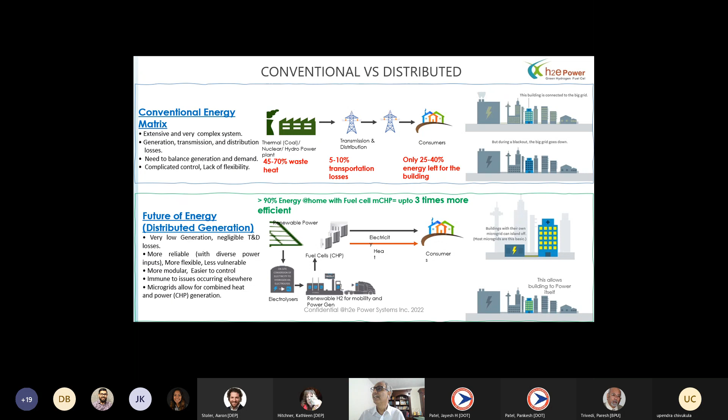Again, this is 7x24, 365. So we have a system today. We have around 1,000 systems running in Europe, and a few hundred systems running across the world. We have 3-4 systems running in the United States. But this is our configuration.

We have a technology that allows us to produce power, heat, and hot water at very high efficiency. It can be scalable; we can build a system from 1.5 kilowatt to megawatt. Our system can reduce carbon footprints. It can take natural gas today, and in the future it will take green hydrogen also. This is a fuel cell technology.

The system runs 24/7, 365. The life of the product is more than 10 years, and every 5 or 7 years you have to replace the stack, just like a filter.

So this is what we are trying to do. We have a scalable model; we can scale from 1.5 kilowatt to megawatt. Our system is very reliable, and it is absolutely noise-free. There is no noise. If you run the system, you will not notice anything in your house or in your commercial building.

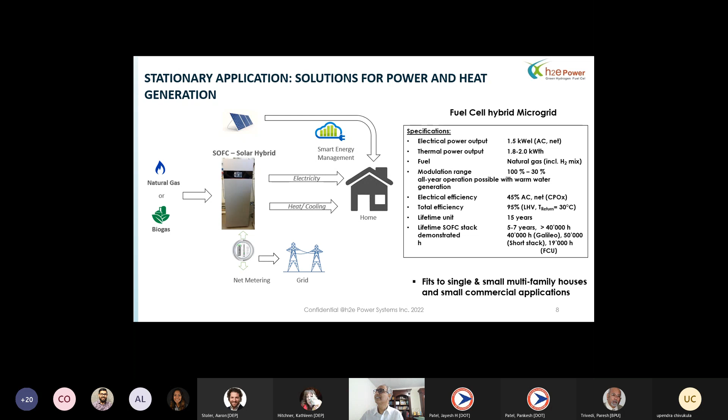As I mentioned before, our system can scale to a bigger system. We can also scale the same technology to 50 kilowatt, 100 kilowatt systems. We have one system today running on biogas in Finland at 50, 52 kilowatts. And if you put 5 or 10 together, you can have a megawatt power plant.

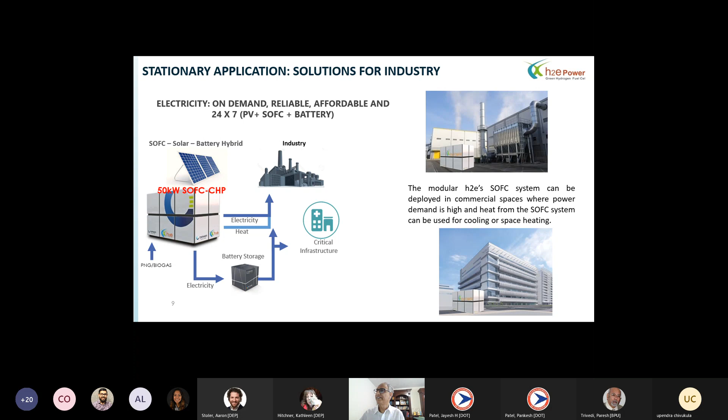So my goal is to bring this technology from Switzerland and Germany to the United States. I am in the process of raising capital to build a manufacturing plant somewhere in New Jersey, Massachusetts, or Ohio, and assemble the system here. There is no technology work that needs to be done - everything is done. I want to assemble the system and put it into the market after I get certification done, and then support the system. That's my goal.

Any questions? I have one question, please.

About hydrogen diffusion from connections between pipes and valves - has that been cleared up, or is hydrogen leaking from different threaded connections as well as valves?

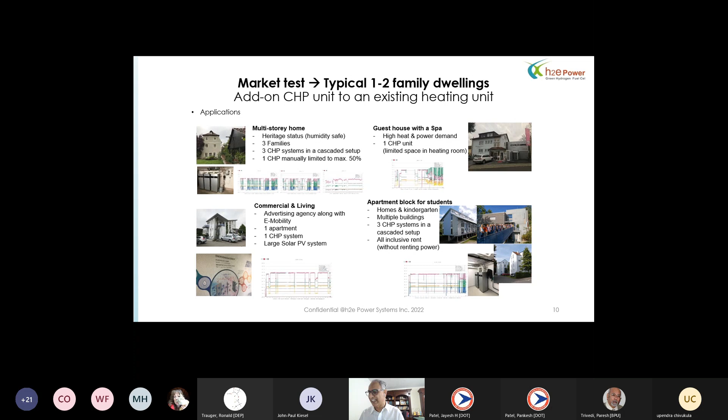Suresh, one thing you may want to watch out for is the make in America or made in America provision. I don't know how that works with subsidies, so you may want to pay attention to that. Yeah, and again, I really want to assemble here, bring this whole thing, because it's no point for me to assemble in Europe and bring it here. Every component in my system, except one critical component called the stack, is a standard component. There's nothing rocket science about it.

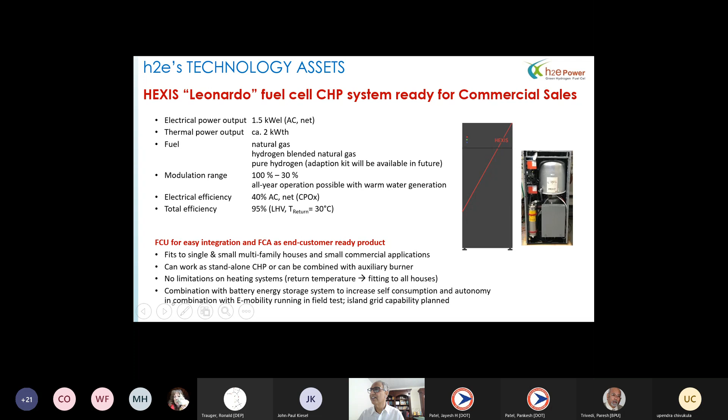So if you look at this system here, next slide, only one piece is a stack which requires assembly. That's an IP, just like a motherboard. Everything else is a standard component I can buy from the open market.

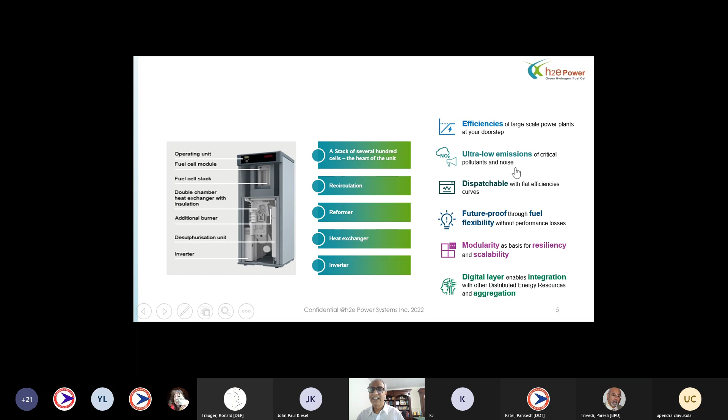So if you look at this box, there are 469 components in the system. Only one component is the most critical IP we have, with more than 150 patents on that particular stack. Everything else you can manufacture, assemble or build anywhere in the United States - there's the cabinet, piping, standard pump, nothing else that critical. So my goal is first to bring the stack from Europe, then buy all the other components here, assemble the system here, test it, and then go to market.

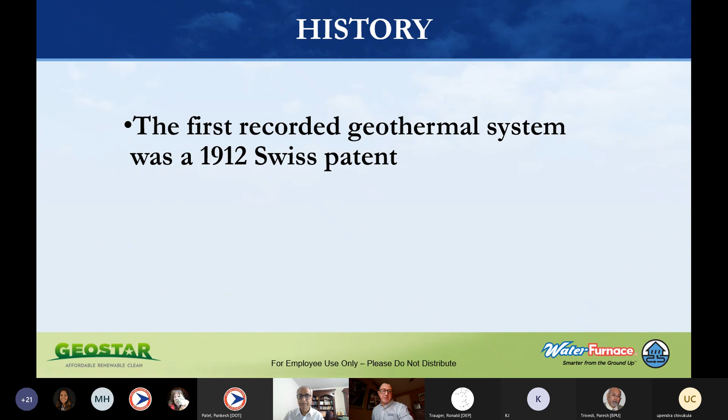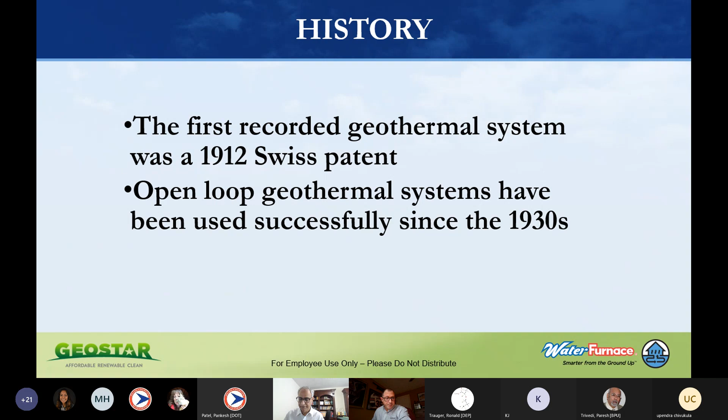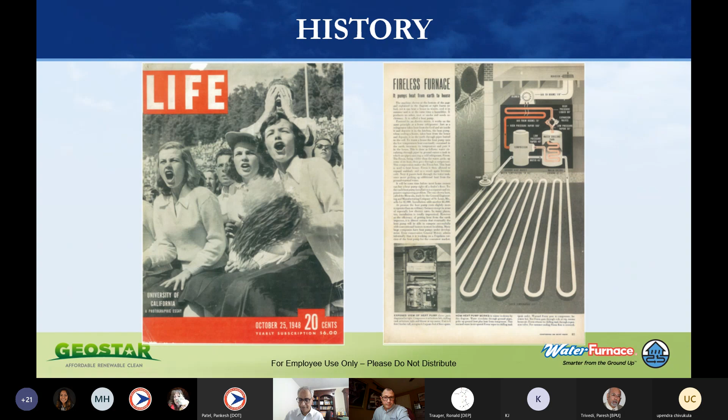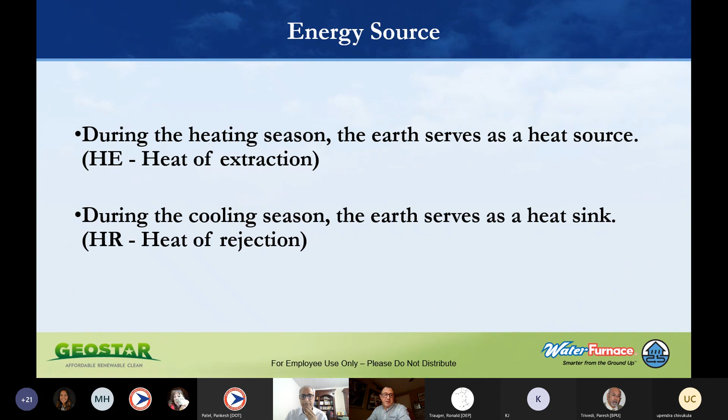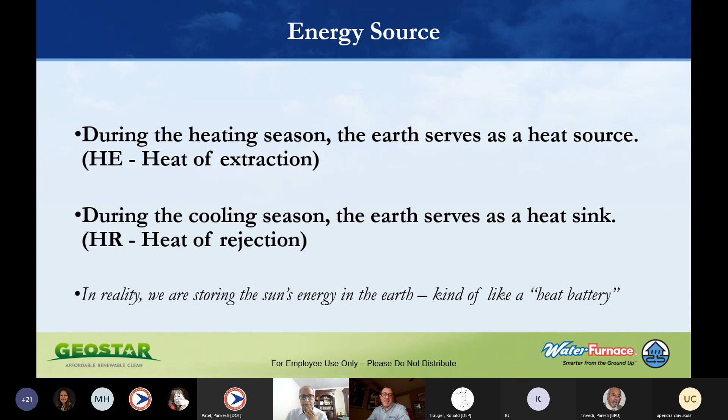With geothermal and ground source heat pumps, as the name indicates, we're using the earth as an energy source. During the heating season, we're taking heat from the earth and moving it to the home - that's called heat extraction. In the cooling season, we're using the earth as a heat sink, taking the extra heat from the home or structure and rejecting it to the ground to be stored, essentially, to use at a later date. The earth absorbs almost half of the thermal energy that hits it from the sun, so essentially we're tapping into that and using the ground like a gigantic heat battery.

The basics of a ground source heat pump system - the earth loop is really where the magic happens. That's how we're able to exchange energy with what's essentially an infinite energy source. The earth loop is placed either in the ground horizontally or vertically, or it can also be placed inside a pond, a lake, or another adequately sized body of water.

Our factory, for example, is based in Fort Wayne, Indiana. That's where we make all of our equipment, and the whole operation is run using ground source heat pumps - we have a big lake loop that runs the whole facility.

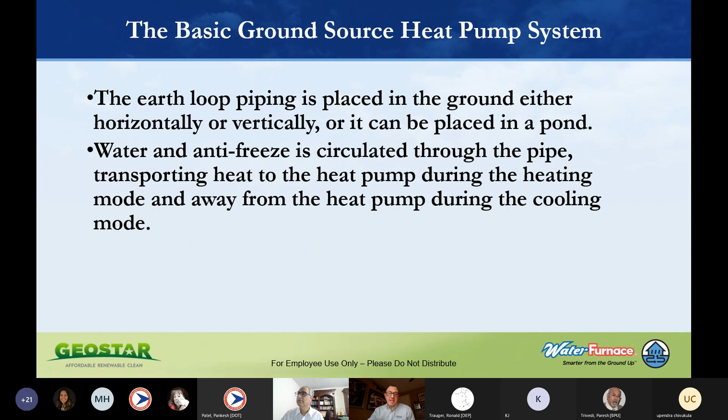A water and antifreeze solution, also called a brine solution, is circulated through that piping so we can transport heat to the heat pump during the heating mode and away from the heat pump during the cooling mode. The heat transfer takes place inside a water-to-refrigerant heat exchanger called the coaxial heat exchanger.

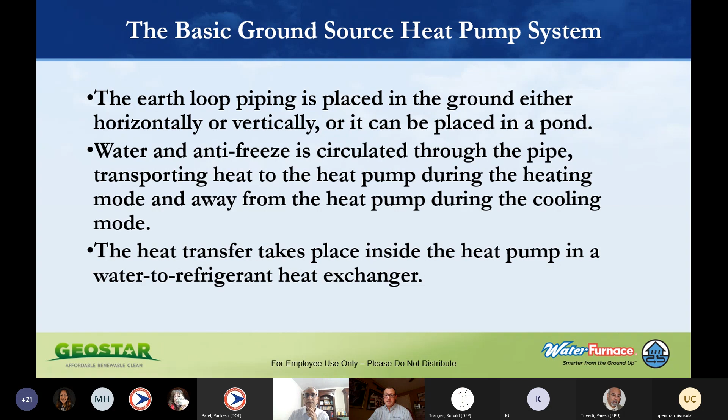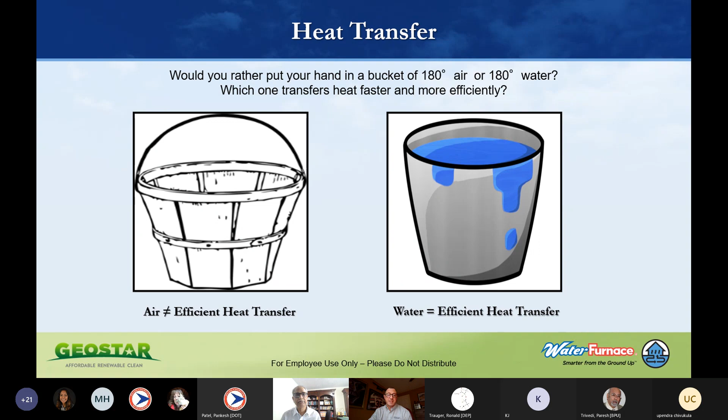We differ from our cousins in the air source heat pump world in the means we use to transfer heat. If you put your hand inside an oven that's 180 degrees or so, as long as you're not touching the sides, you can leave it in there for a pretty long period of time. But if you put your hand inside a bucket of water that was 180 degrees, you'd really see how quickly the heat transfers using water - so it's a much more efficient means of transfer.

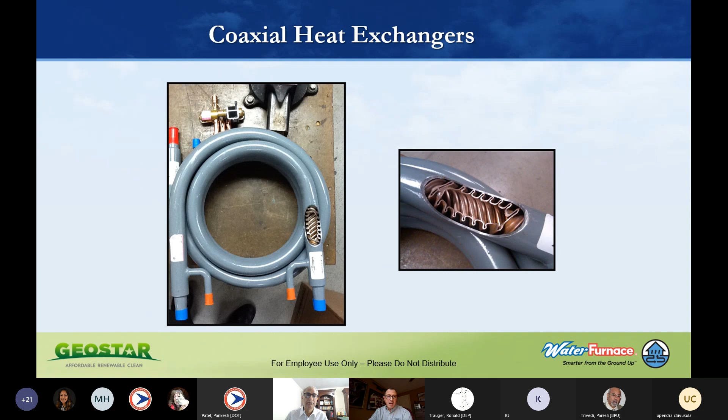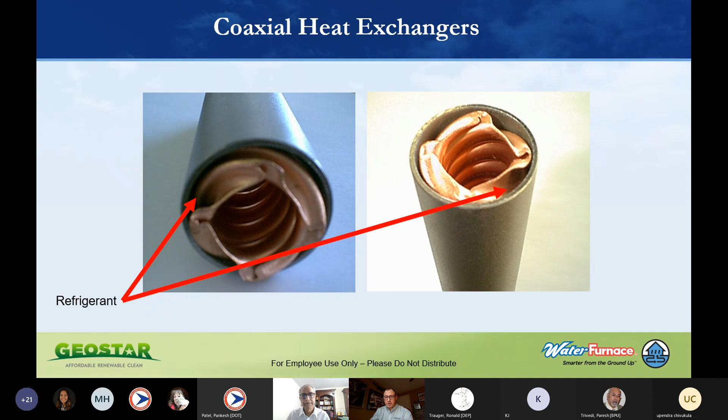Here we have an example of a coaxial heat exchanger in cutaway - you can see a detailed photo on the right. Here we've got a shot of the same coax heat exchanger from the end. The water or brine solution runs through the center of that twisted copper pipe, and the refrigerant is circulated between the copper pipe and the outer wall you see there. Essentially, it's very similar to a flue pipe that you'd see for a condensing boiler or furnace - both are running through it at the same time, but they're not coming into contact with one another.

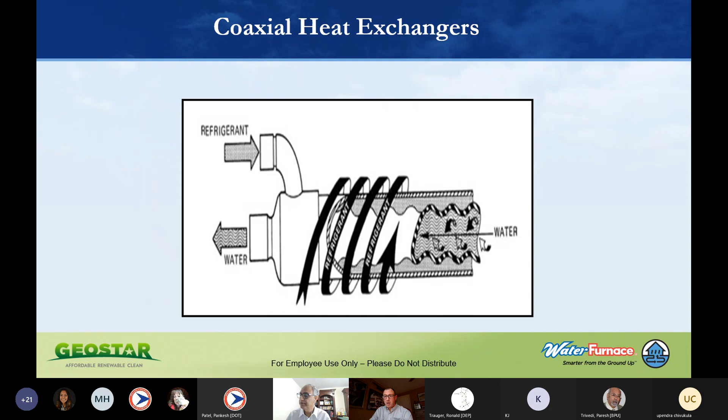A lot of times people will ask me, well, how can you heat a home when you're taking heat from the ground, which, once you get down far enough, averages about 50 degrees and pretty much stays there all year round, not influenced by the outdoor air temperature.

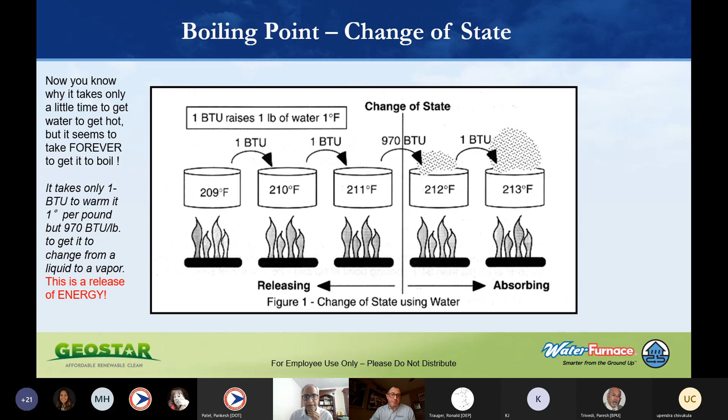By using refrigerant, a state of change, and being able to manipulate pressures, we can do that. So 1 BTU will raise 1 pound of water by 1 degree Fahrenheit. But then once you hit 211 degrees, to get it to that boiling point and to that state change, we need much more energy, almost 1,000 BTUs, in order to get that liquid to turn into a gas. And that is where you get that massive energy release.

With refrigerants, in conventional residential equipment right now, 410 is the preferred refrigerant. That's going to be changing in a few years, but we'll use that as an example right now. At 10 psi, it will boil at minus 41 degrees Fahrenheit. At 500 psi, it's going to boil at 134 degrees Fahrenheit.

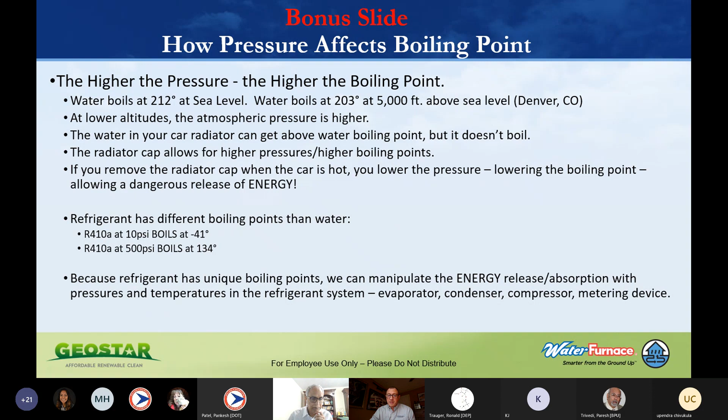We're able to manipulate the energy release and absorption of energy at different points in the refrigerant cycle by using metering devices, condensing coils, evaporator coils, compressors, those sorts of things.

Here we're going to look at an example of what the refrigerant cycle looks like inside of a water source heat pump, and I'm going to equate it to something that most of you are probably more familiar with. Over here on the left, we can see the air coil, and that's going to be the equivalent of the air coil that you would have sitting on top of the furnace in your basement or mechanical room, for example, or in the air handler in your attic for your air conditioner, maybe. The big difference, though, with ground source is the coaxial heat exchanger, as I've mentioned before, and this coax over here is going to be connected to the ground loop.

And what that equates to in a conventional system is like your outdoor condenser coil over here, which is what's used to exchange the heat in your conventional air source kind of system. Obviously, the compressor unit is going to be in the conventional system on the outdoor unit, but in our equipment, the compressor is going to be inside the house.

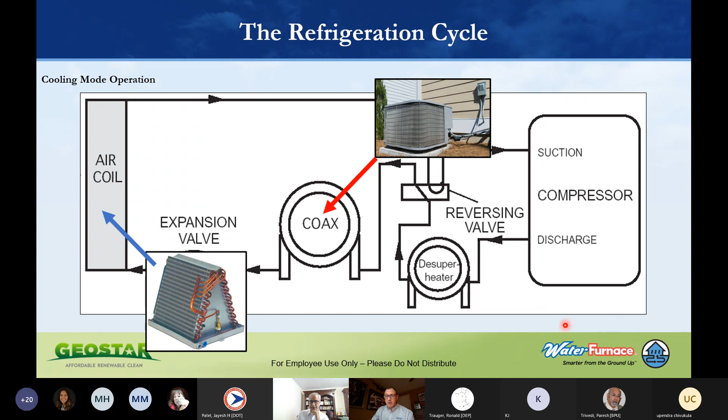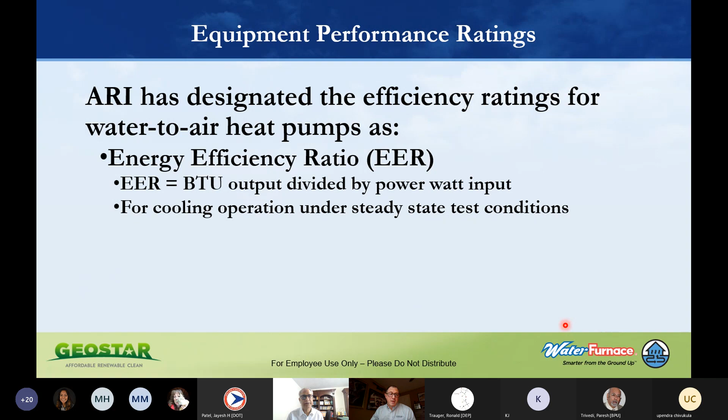ARI has designated the efficiency ratings for water-to-air heat pumps and water-to-water heat pumps as just water source heat pumps. We use EER, or energy efficiency ratio, and that's basically the BTU output divided by the power watt input. That's going to be your rating for your cooling operation under steady state test conditions. And then on the heating side, we're using coefficient of performance, also known as COP. That's just the BTU output divided by the BTU input. So that's heating operation under steady state test conditions.

Just to give you an idea, your toaster, electric baseboard, any standard electric resistance heat has a COP of 1, meaning it's 100% efficient. We're getting every bit of energy that we're putting into it back as thermal energy out. By using heat pumps and refrigerant, we're able to explode that. With ground source heat pumps, our most efficient equipment has COPs as high as 6. So for every 1 unit of energy you put in, you're getting 5 free units back from the earth.

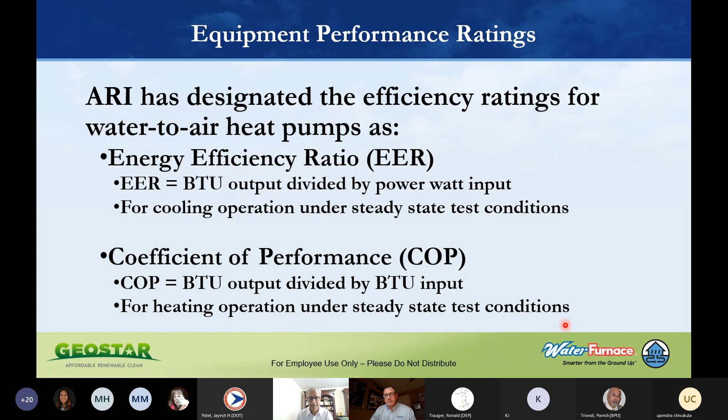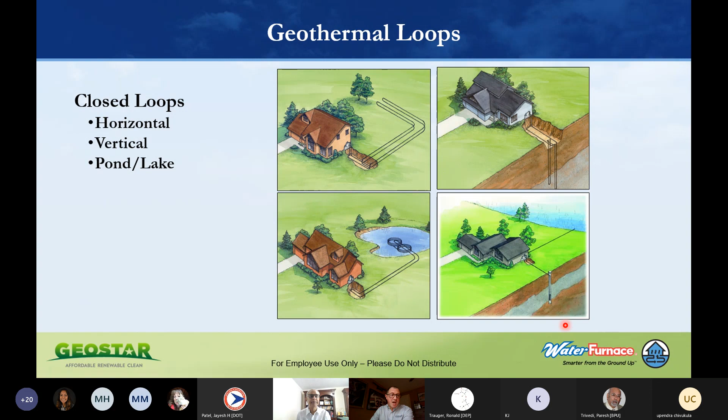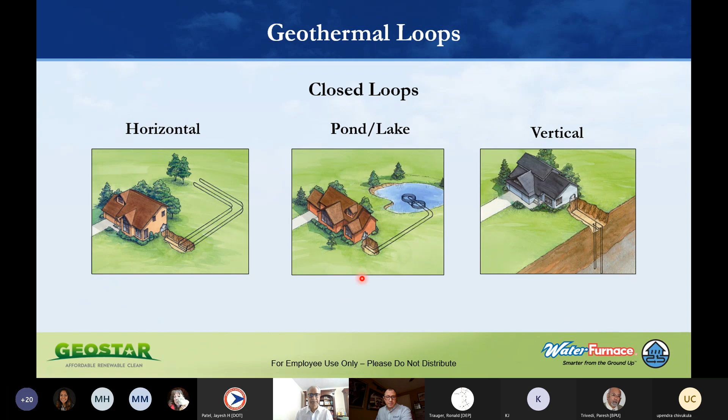Over here we've got some examples of geothermal loops. There's closed loops, your horizontal loop, vertical bore, or a pond or a lake loop. And then there's also your open loops, which use well water. So on the left, we'll see the example of a horizontal loop. This is an example of a pond loop or a lake loop. And then this is going to be your vertical bore over here.

The features of your typical earth loop are going to be the circuit piping. There's going to be multiple circuits typically, and those will be either trenches or bores for a vertical application, which is typically what we're going to see more of in New Jersey, in North Jersey in particular. It's almost always going to be a vertical bore, and the amount of circuits is going to be sized based upon the capacity of the equipment and what the structure requires.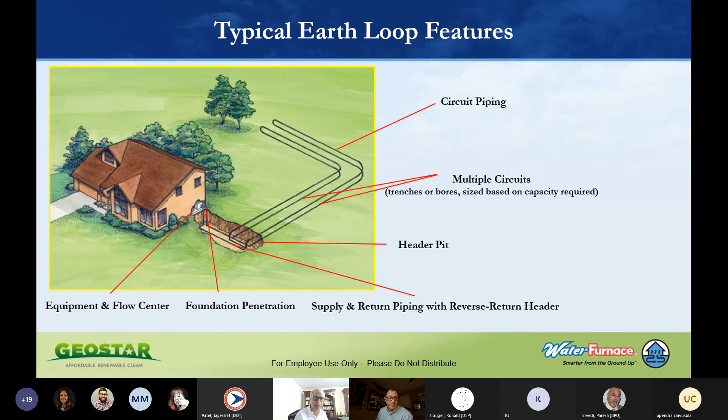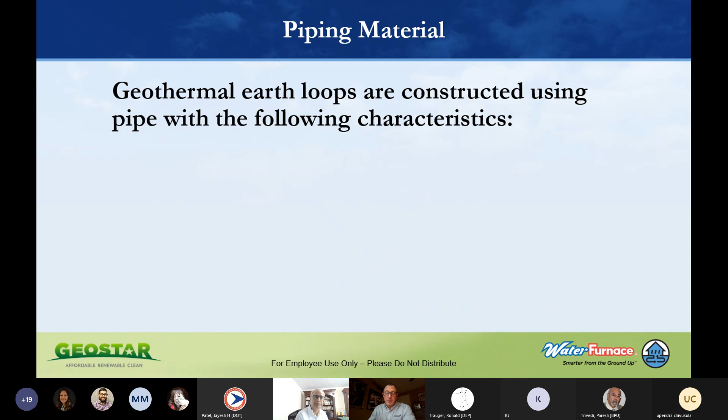The piping material used to construct a geothermal heat exchanger is polyethylene pipe, HDPE 3408, SDR11 rated, in IPS sizes of 3/4 of an inch in diameter and up. All connections are done using heat fusion at 500 degrees Fahrenheit, so there are no mechanical connections. When piping is properly fused, you have one continuous piece of material with no opportunities for leaks at any of the connections.

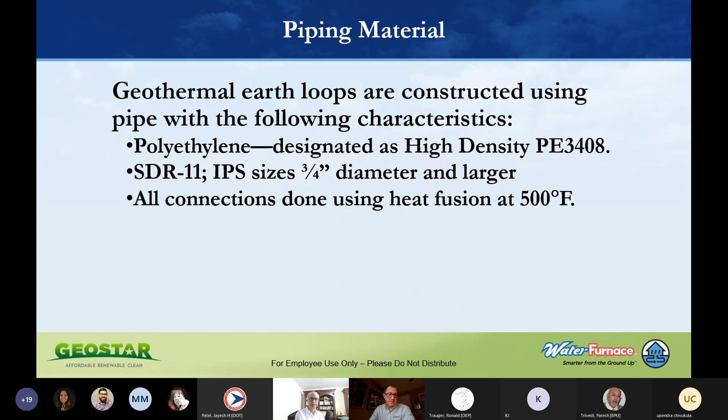HDPE 3408 is one of the highest rated materials for stress crack resistance. It's made of a carbon black material that provides UV protection from the sun, so on the job site a contractor doesn't have to protect it, and there's no degradation in material integrity from UV rays. It can elongate to six times its original length before any pipe failure, making it an extremely durable material with a life expectancy of 100 years or more.

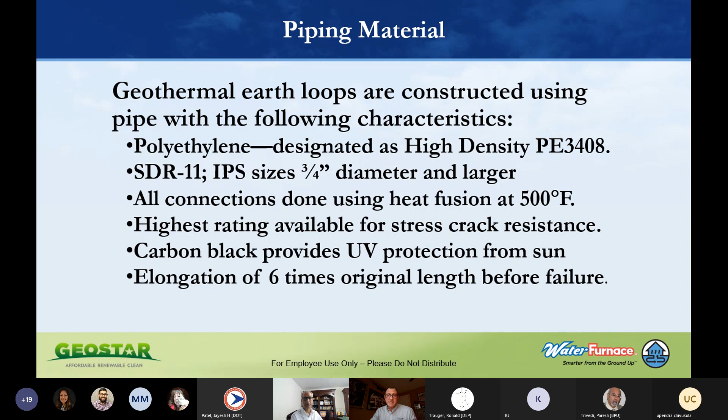For a lake loop, you want to have it at a minimum depth of at least 8 feet, and keep in mind that's the lowest level. For example, last summer we had a pretty bad drought in New Jersey, and water levels in lakes and reservoirs dropped considerably in some areas. So you want to make sure these lake loops are submerged at an adequate depth if this is something you're going to choose.

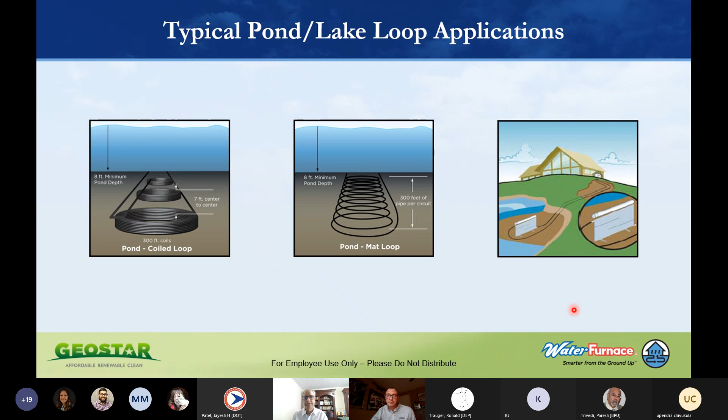Then we have open loops. Some key considerations when thinking about an open loop system: number one is an adequate water supply. We want a flow rate of a minimum of 1.5 to 2 gallons per minute per ton of capacity, in addition to whatever the domestic requirements of that household or structure are.

We want good water quality flowing through the equipment. If you've got a well at your home and notice a lot of calcium and lime scaling on your faucets and aerators, that's also going to build up on the inside of the equipment, reducing the life of the equipment as well as the efficiency of the heat exchange. So we want good quality water flowing through to protect your equipment and make sure it's operating at its peak.

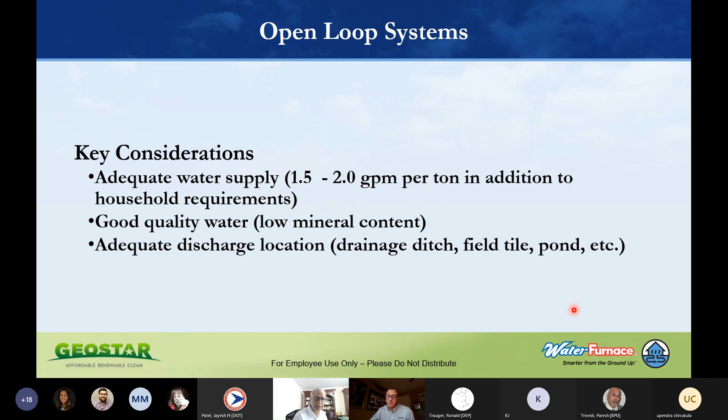We also want to make sure we have an adequate discharge location, such as a drainage ditch, a field tile, a nearby pond or body of water, or an injection well. It varies depending on codes and DEP requirements. Typically in New Jersey, when I see open loop designs, there's a well we're taking water from, and a second well we're injecting the water back into, so you'll want to check with your local code officials.

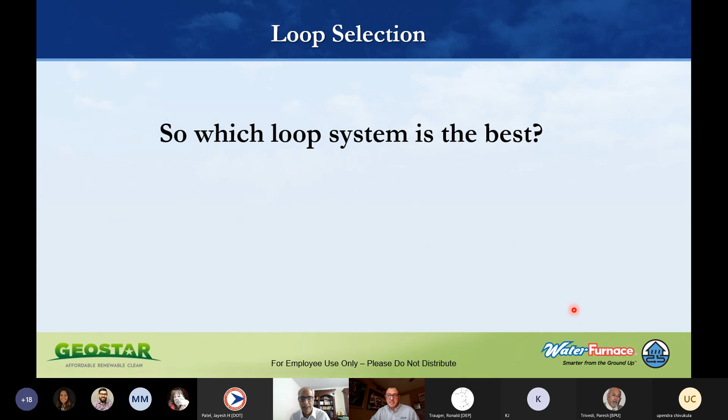Here's the big question I always get: what's the best loop? It's a pretty simple answer really. The best loop is the one that's going to meet the capacity and comfort requirements of the structure and the equipment for the lowest installed price. They all work great—it's just which one meets your particular requirements. So just like everything else in life, the answer is: it really depends on the specifics.

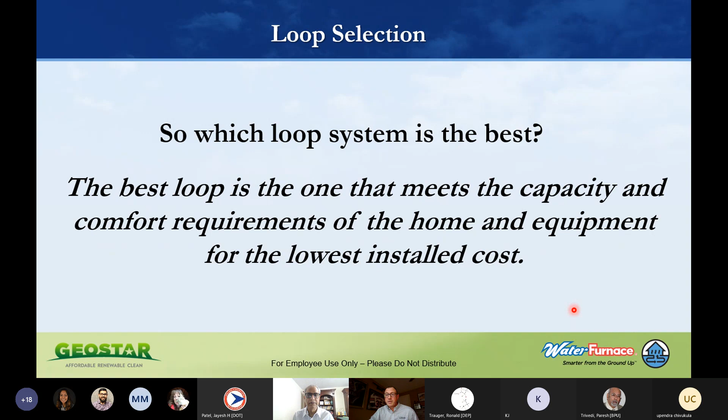In order to design a loop properly—because if you've got a geosystem with a poorly designed loop, it's not going to work, and that's not because the equipment isn't right, that's bad design—so how do we properly design a loop?

At WaterFurnace, we have a program that we use called GeoLink Design Studio. This is for residential applications. There's different software available also for residential applications, and you'll want to use different software for commercial applications as well.

By using the proper software and coming to the table with a good load calculation on the structure, we're going to ensure we have a proper loop design. GeoLink Design Studio, for example, makes sure you have the right loop design. It gives you operating cost comparisons, demonstrates financial scenarios and cash flows, calculates pressure drops and pump sizing, and tells you your loop volume and how much antifreeze you need. It's an excellent and necessary design tool.

Using rule of thumb on something like a loop is a very bad practice, and it can be very expensive to fix if you short loop and don't have the proper capacity.

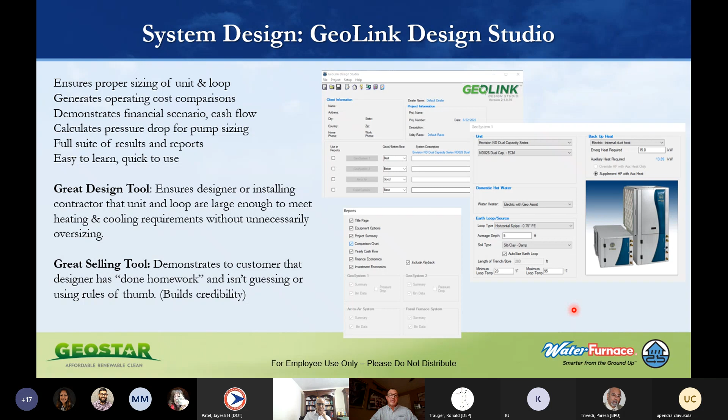If we've got some extra time, I've got an example of a report that I generated using GeoLink, so maybe we can go over that in a little bit. Yeah, you can do that.

Some of the key benefits of a geothermal system to homeowners: energy savings for heating and cooling, as well as options to supply domestic hot water, quiet operation, and less maintenance. One of our systems really has hardly any maintenance to it at all.

All you need to do is change your air filters, make sure the air coil is clean, and make sure the condensate drains are clear, and that's pretty much it. You don't have to check refrigerant levels or clean an outdoor unit, because there's no outdoor condensing unit required, which means you have a much longer life expectancy, almost double that of a conventional system.

A conventional system is rated by ARI at about 12 to 15 year average life. A geosystem typically has about a 25-year life expectancy. I frequently get calls from customers looking to replace units that are 30 years old and older.

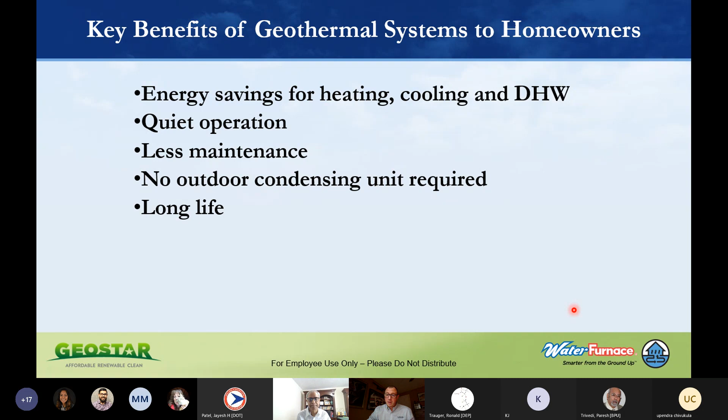They're safe and clean. There's no combustion, no flames, no flues, no carbon monoxide. It's one of the most environmentally friendly products on the market, and it decreases peak demands for electricity.

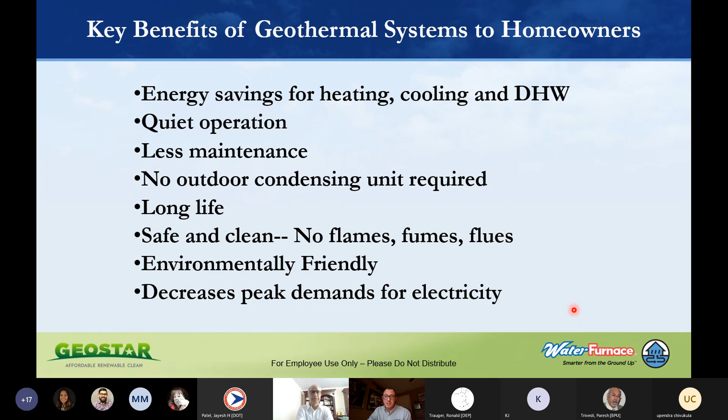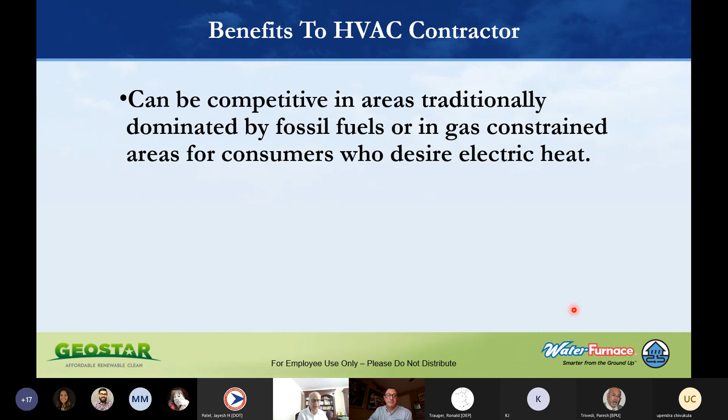Some of the benefits of our systems to the HVAC contractor: it allows them to be competitive and offer products traditionally dominated by fossil fuels or in gas-constrained areas. We're starting to see this more and more where gas utilities are not expanding into certain areas. This is happening in New York, Massachusetts, Connecticut, and it's starting to happen a lot more across the nation. So this offers an alternative for folks in gas-constrained areas who still want electric heat.

It's a higher job price tag, meaning higher profit margins for the HVAC contractor, simple operation and maintenance for them, and it allows them to offer a product with cutting-edge technology that appeals to the modern consumer.

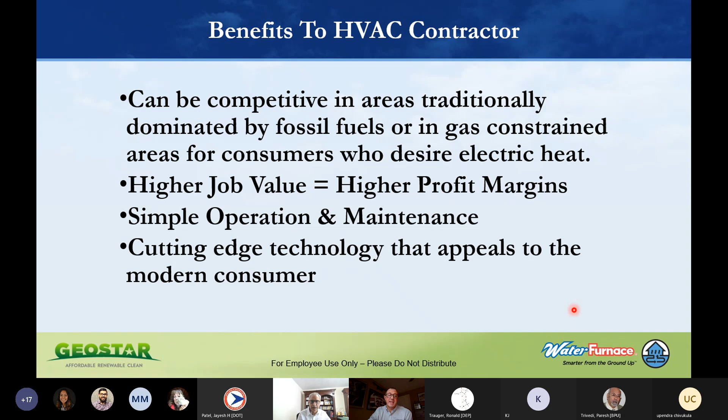Some of the benefits to the utilities: the EPA has found that ground source heat pump systems can reduce energy consumption and corresponding emissions by over 40% compared to air source heat pumps, and by over 70% compared to electric resistance heating with standard air conditioning equipment.

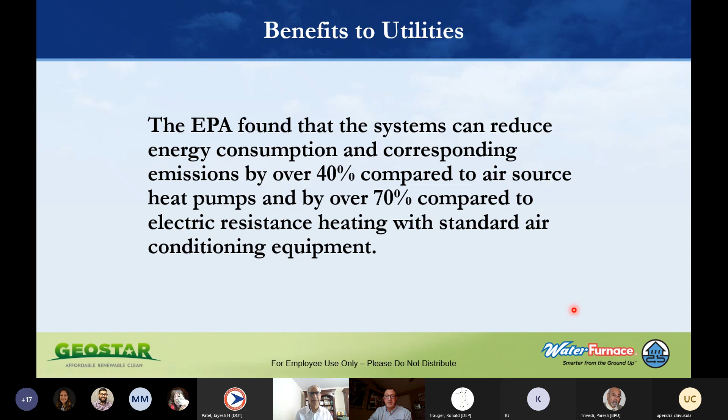Benefits to the electric utilities: obviously there's peak load reduction. It allows the electric utility to have overall load growth with consistent 12-month demand, instead of having to build systems for worst case like our summer peak in New Jersey, but then demand drops way off in winter. When more people heat with electric, we'll have a winter load greater than or equal to that summer load, so it's a more consistent demand for the utility.

It's a renewable energy and gets credit for that from the federal government, so one ground source heat pump equals 30 or more thermal renewable energy credits per year. It's an alternative renewable energy to solar with no net metering, and it's the most efficient equipment available on the market, with EER ratings between 20 and 53 and COP ratings between 3 and 6.

And yay for the electric utilities, it allows them to sell more kilowatt hours. So that's good.

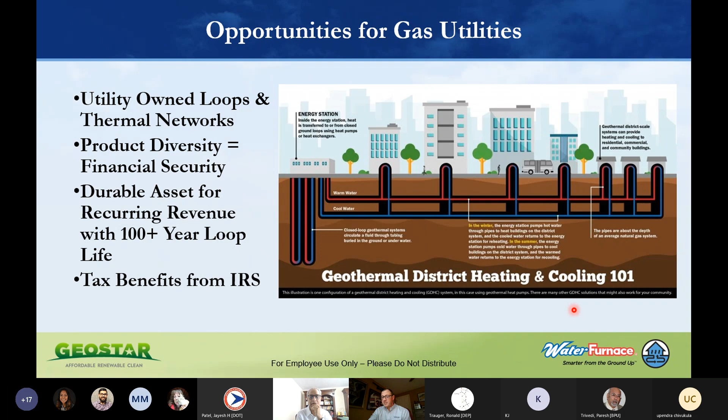Some interesting facts about Geo: if 1 in 12 California homes installed a Geo Exchange system, the energy savings would be the equivalent of 9 new power plants being built. Installing a Geo Exchange system in a typical home is equal in greenhouse gas reduction to planting an acre of trees or taking 2 cars off the road.

Current Geo Exchange installations equal over 14 million barrels of crude oil saved per year. And as I said earlier, the ground absorbs 47% of the thermal energy from the sun that reaches the earth. This amount of energy represents more than 500 times more than humanity consumes each year.

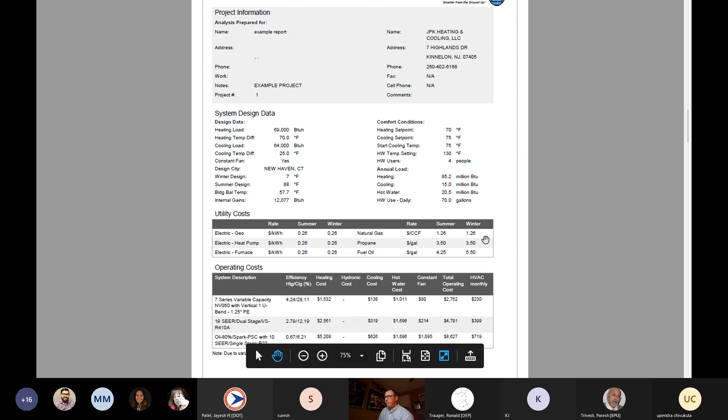In GeoLink, we're able to put in utility costs. So what I'm assuming in this example is a kilowatt-hour rate delivered to the home of 26 cents per kilowatt hour, which is probably pretty average for most of New Jersey. We're looking at a fuel oil rate of $5.50 a gallon, which is what this person was paying in the middle of winter, with a summer rate of $4.25. And we're assuming a $3.50 per gallon rate for propane. These are pretty realistic costs that I'm assuming in terms of utility.

This program uses 20 years of historical weather data, and it's running each system through that same simulation of the last 20 years using those fuel rates. So it's going to give you realistic costs.

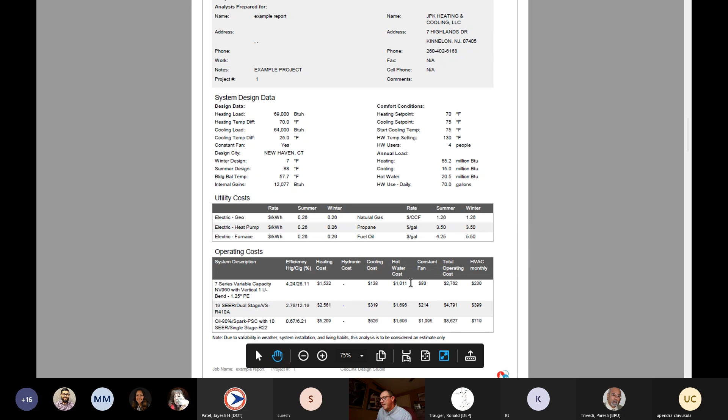Using these assumptions and this system design data, we find that my 7 series equipment has a total annual operating cost of $2,762. That's $1,500 for heating, $138 for cooling, and $1,000 being delivered to your hot water.

Oops. Let's see. Good. Can you guys see this better? Maybe this is a little bit more clear.

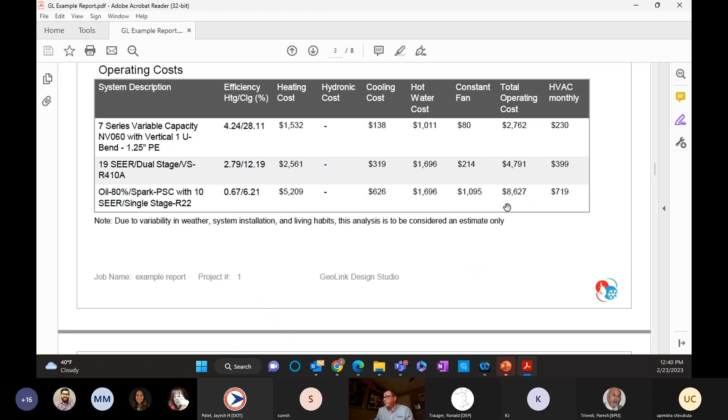So here's the operating costs. Using the air source heat pump option I was comparing to, we're looking at an annual heating cost of $2,500, an annual hot water cost of $1,700, for a total operating cost of $4,700 — $2,000 more than mine. Compared to the base system assumed in this fictional home, using oil and a 10-SEER air conditioner, the total operating expense is almost $8,700. So it's a pretty considerable savings.

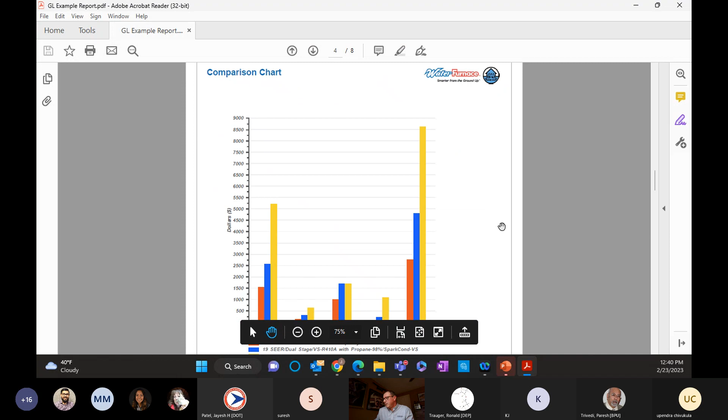And it'll give you all different kinds of charts and graphs, because people like charts and graphs — it makes everything visual. And then over here, this is really my favorite part of the report that gets generated.

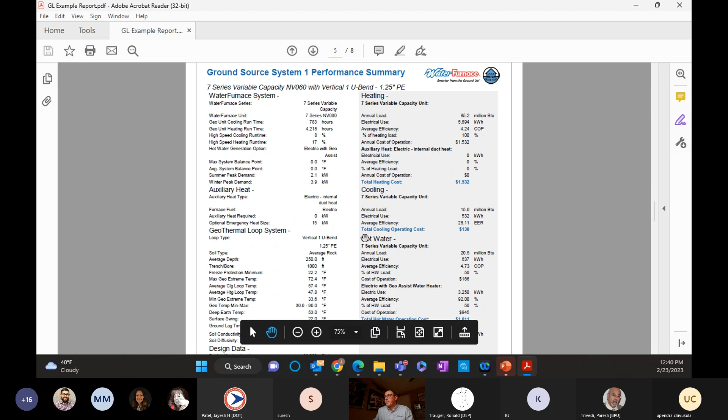It gives you a full performance summary. It tells you about the equipment, it tells you about the loop, it tells you about your loop performance over here. This is something that's really important — it tells you how to size the system.

So what we were assuming with this loop design was that we have 500-foot bores. The total bore required to deliver the required BTUs for this system is 1,000 feet, so we've got 2 bores at 500 feet deep. The average depth is 250 feet of that bore.

The minimum temperature that this loop is going to reach is 33 degrees Fahrenheit, and the maximum temperature that this loop is going to hit when we're rejecting heat in the summertime is 72 degrees.

A good loop is going to perform in a range between 30 and 90 degrees. Your maximum extreme temperature should be 90 degrees or less, and your minimum should be 30 degrees or more. If you go below that minimum or above that maximum, you can start taxing the ground, either freezing it or heating it so much that you basically cook it and get rid of all the moisture around it. So having a proper loop design is extremely important.

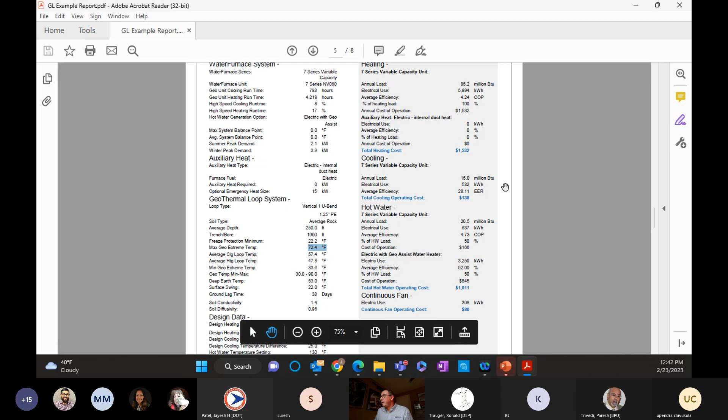And over here is a detail of the summary that I showed you before.

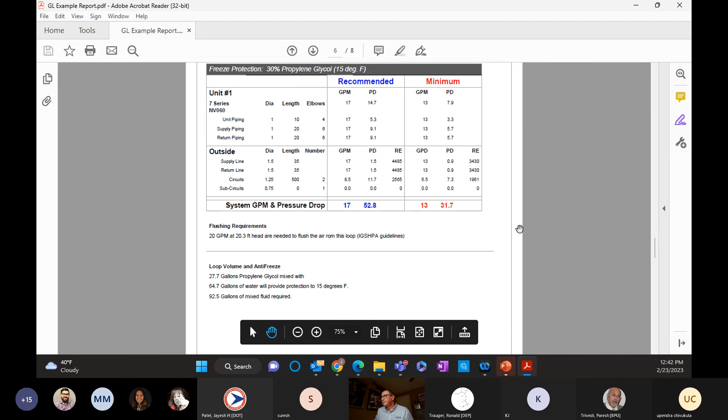This is some information on the pressure drop of the loop. We plug in the information on the loop: we've got 2 500-foot bores, using 1.25-inch pipe, with supply and return piping at 1.5 inches. These are some of the details you can plug in as you design your loop to make sure it's performing correctly. For example, if I used 1-inch pipe instead of 1.25 inches, I'd probably need an additional bore and a bigger pump, which uses more energy to move the brine solution through the loop.

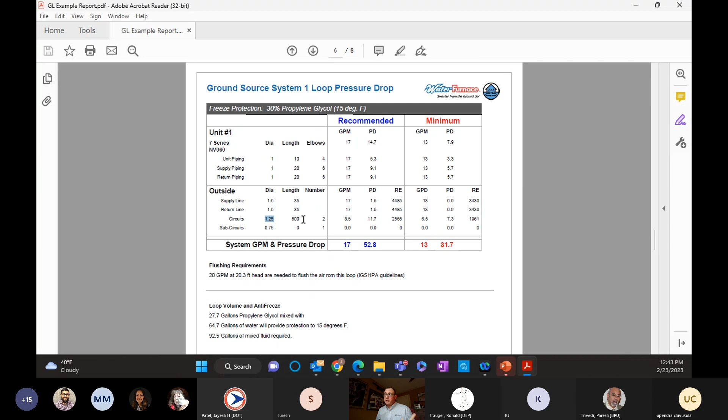And then we've got some pressure drop charts over here, and this is the bin data stuff. So there's all kinds of really good information in the program.

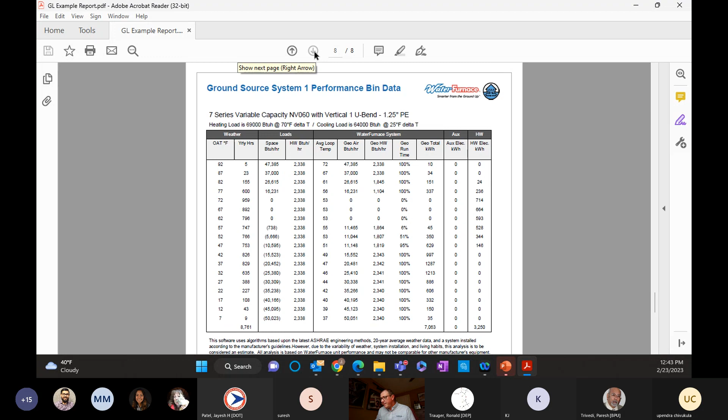There's one other thing I wanted to share with you guys. This is a product we have called Symphony. Symphony is a monitoring device, an accessory that we can put onto almost every heat pump we have, on the residential side in particular. It allows for energy monitoring for the homeowner and gives them remote access. For the installation contractor, it allows them to monitor system performance.

Symphony is collecting over 100 data points of information every 10 seconds and recording that, so you can see detailed graphs, which is great if there are issues like intermittent lockouts. It allows the contractor to remotely see what happened at the particular moment of failure, remotely troubleshoot it, and even remotely repair it in some cases.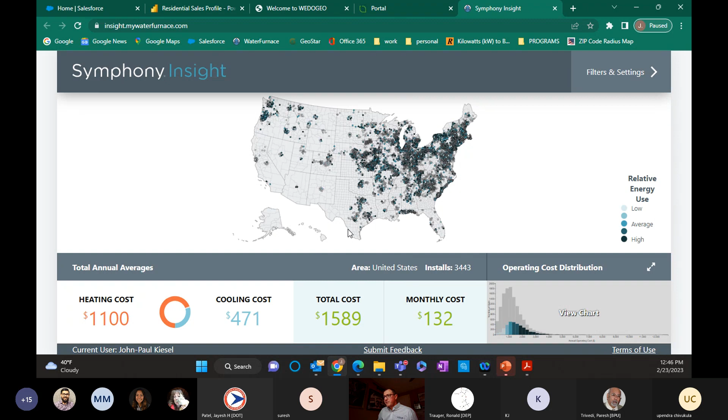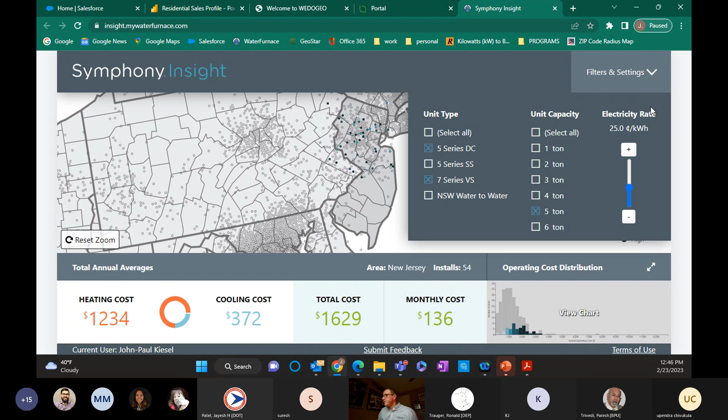We can get even more granular and look at just 5 series dual capacity units and 7 series variable speed capacity units that are 5 tons. Using those slicers, there are 54 of those units running, with a total annual cost of $1,600, or an average of $136 per month for homeowners to run them, using the assumed input of 25 cents per kilowatt hour.

There's some really cool stuff here, and like I said earlier, we need the support of men and women like you all listening to me right now so we can see more adoption. I'd like to see 5,000 of these units in New Jersey instead of just 54. This is a way we can really move more toward grid stability and away from fossil fuels, more toward electrification.

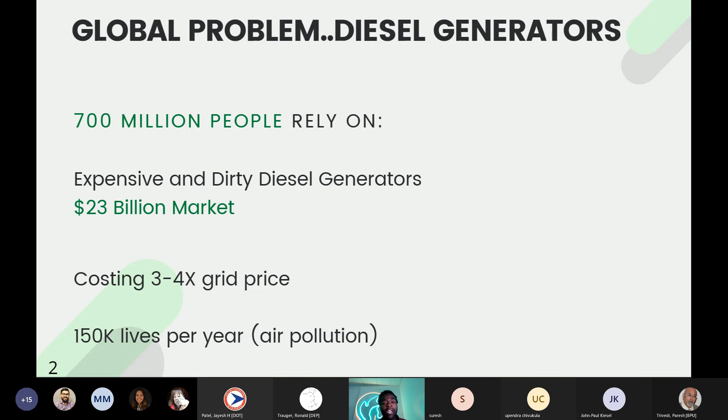So the solution we've built is the FTF generator. This is a carbon neutral electricity asset that is just as reliable as diesel, but half the cost, with no smoke and no odor. It's built into a shipping container for portability, with the ability to raise the generator up above sea levels during storm surge events, and just as a hybrid model for those who need reliable power.

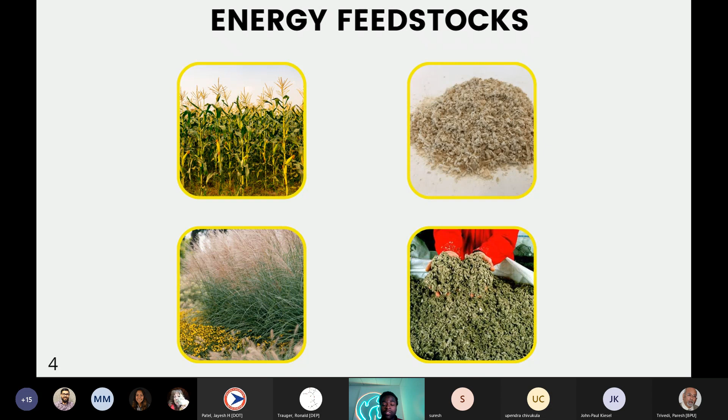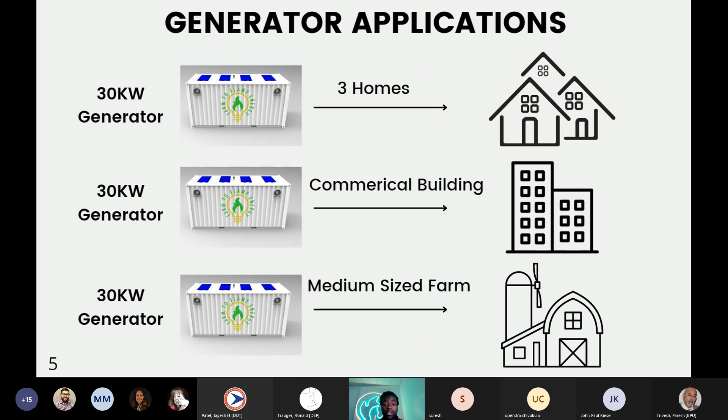We use several energy feedstocks in our generation process. We pulverize them, and that's how we're able to burn them smokeless and odorless. These feedstocks include corn stalks, wood waste, miscanthus, paper waste, and more. One of our 30 kilowatt generators can power 3 homes, a commercial building, or a medium-sized farm.

So we've actually built this generator. This generator on the right is the FTF 30 kilowatt generator. We built that at Kearny Point in Kearny, New Jersey. We were very grateful to get funding from the EPA, the U.S. Environmental Protection Agency, as well as the New Jersey Board of Public Utilities, partnered with the New Jersey Commission on Science, Innovation, and Technology to build out this generator.

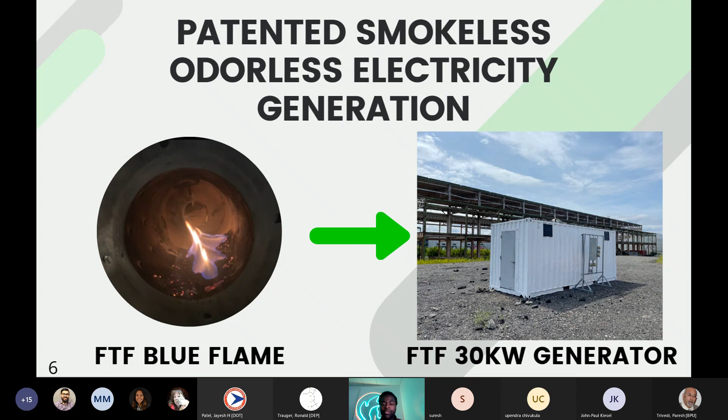This generator has actually allowed us to enable our combustion process. Our patented combustion process helped us burn fuel smokeless and odorless. But it wasn't until we started building this that we actually achieved the blue flame, which is pretty much unseen in the biomass to electricity industry. This is very unique because it means we have low carbon monoxide compared to a lot of biomass combustion, and that's really because of what we do on the fuel treatment and fuel processing side to get that higher combustion efficiency. And we're cheaper than existing options.

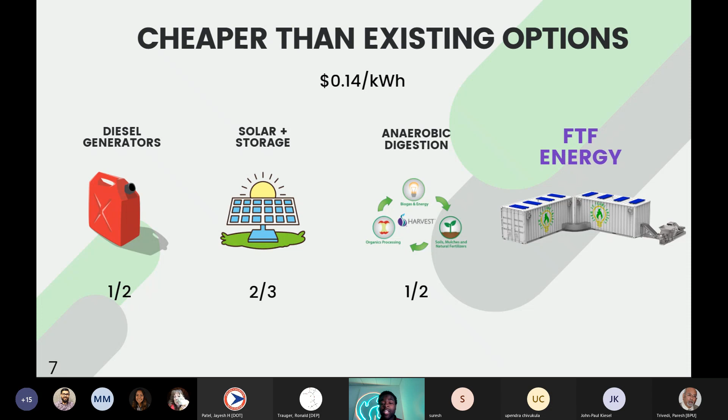We're cheaper than diesel by half, solar plus storage by 2/3, as a battery paired with the panels prohibits cost-effective baseload power. We're cheaper than anaerobic digestion by half. Our generators operate at 14 cents per kilowatt hour with no methane, no conflict minerals, and no toxic emissions in our carbon neutral supply chain.

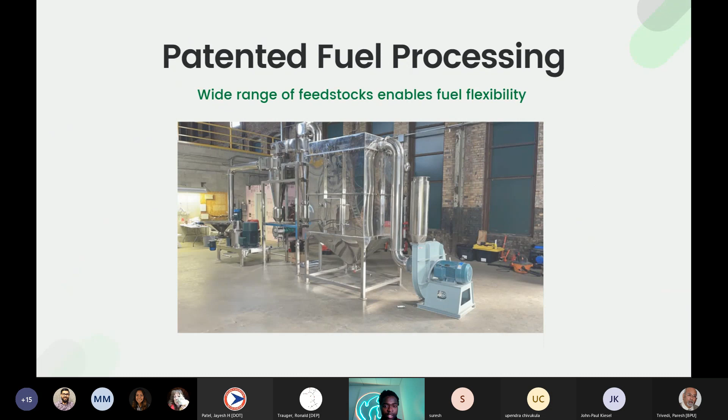Speaking more on the fuel processing side and what we do to achieve high combustion efficiency: we use a wide range of feedstocks, but the main component is our fine grinder. This allows us to grind down sawdust-sized material finer than powder, to under 104 microns with an 80% distribution under 60 microns, which lets us disperse the fuel in air and atomize it, burning pretty much all the fuel.

That's a big problem with biomass generators and gasifiers: particle size is variable. You could be burning 1 to 2 inch wood chips, burning the outside of the wood, but there's also a lot of moisture trapped inside that you can't burn. So you form tar and carbon monoxide, which doesn't help with EPA emissions for CO, NOx, SOx, and also DEP.

These are really important points of what we do. We began talking to the DEP in New Jersey about this in 2021, and they were very excited as well.

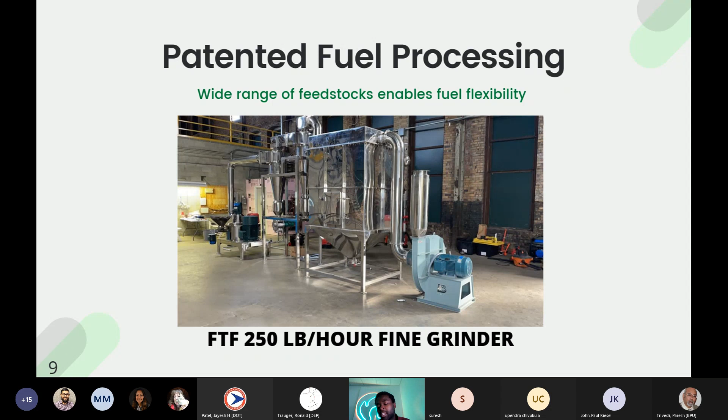The next thing is the dryness of the material. So you have the particle size, but you also have the moisture content. We utilize a rotary dryer to dry down under 5% moisture content, and that's what also allows us to achieve that high combustion efficiency.

Furthermore, we're using machine learning and LiDAR imaging for fuel quality assessment. This is for streams that are heterogeneous in nature, maybe from a landfill or impurities from a sawmill. We can remove non-viable components like plastics, glass, and rocks from the feedstock, which helps increase our revenue by increasing the fuel stream purity.

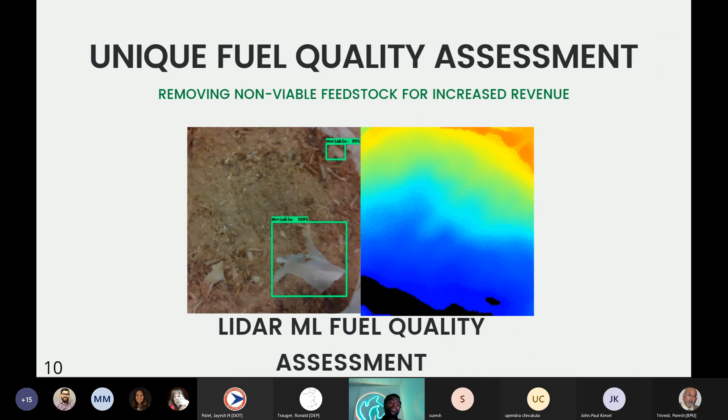We make money with energy as a service agreements, also known as power purchase agreements. This costs the customer 14 cents per kilowatt hour on average, structured just like the utility bill you receive at the end of the month. It allows us profit margins of up to 40%, and the customer doesn't pay the down payment or capital costs on the equipment, but instead experiences savings on their current solution over a 10-year-plus contract. Our average PPA or CHP contract runs 10 to 20 years, equaling $250,000.

We have $1.9 million in the pipeline for 2023. We're right now doing a project with Georgia Pacific, the third largest paper maker in the country and the largest biomass electricity producer in the country, because paper waste is pulped wood. They have all this wood they're using to power their energy-intensive paper making processes, and they sell the remainder back to the grid.

They saw that we were doing a high thermal efficiency project and wanted to partner with us to include this in their paper dryers, converting their paper dryers from natural gas to farm to flame paper dryers that use their own sludge to dry their paper. This creates a circular loop for their economic model, and it's a waste diversion initiative for carbon neutral electricity generation.